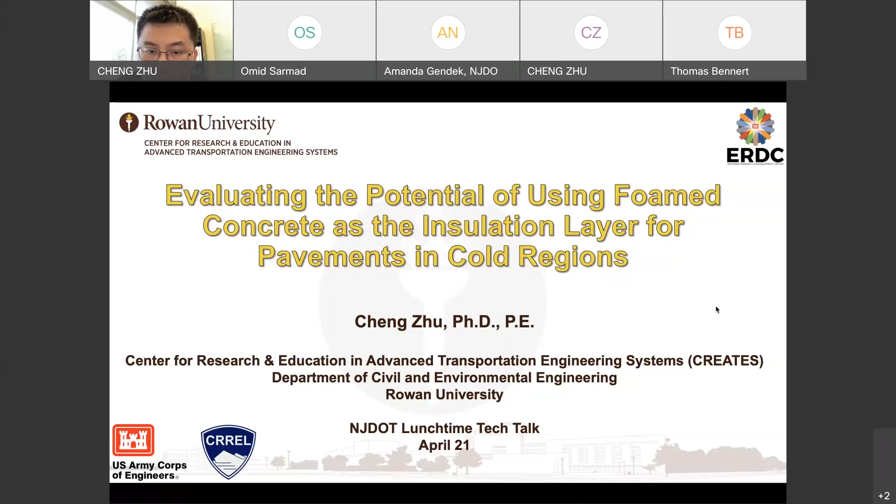Good afternoon, everyone. Thank you very much for coming to this webinar, and thanks NJDOT for organizing this Lunchtime Tech Talk. I'm Cheng from Rowan University. Today I would like to present our research on evaluating the potential of using foam concrete as an insulation layer for pavements in cold regions. First, I would like to acknowledge the support that we have from the Department of Defense Cold Regions Research and Engineering Lab and a number of our collaborators, as well as our internal collaborators at Rowan University. We also received support from several local companies for providing those materials for testing.

So this is the outline of my presentation. Let's start with the background and objective.

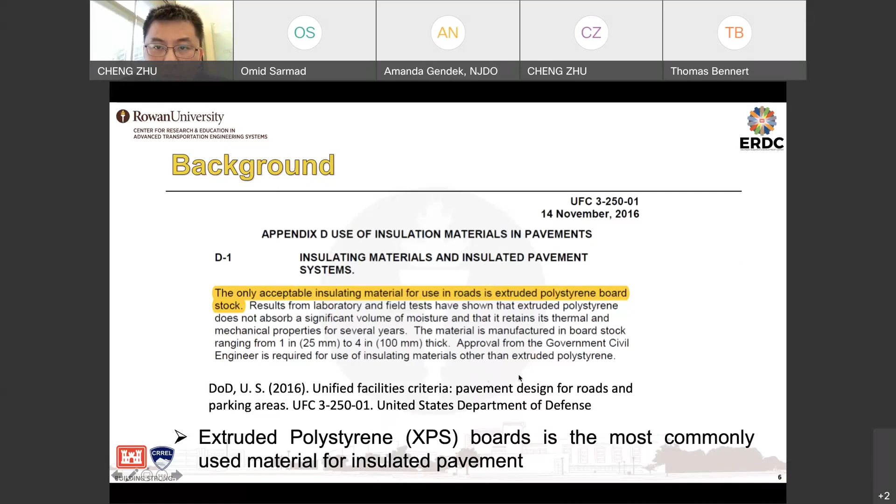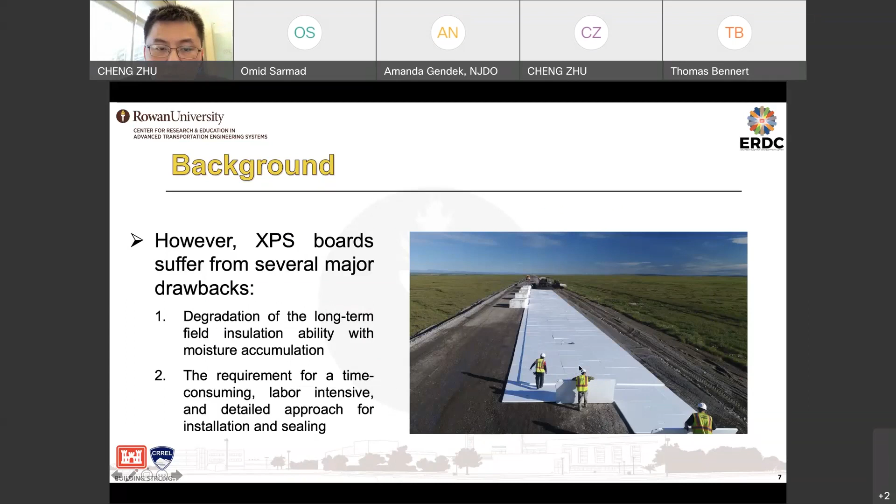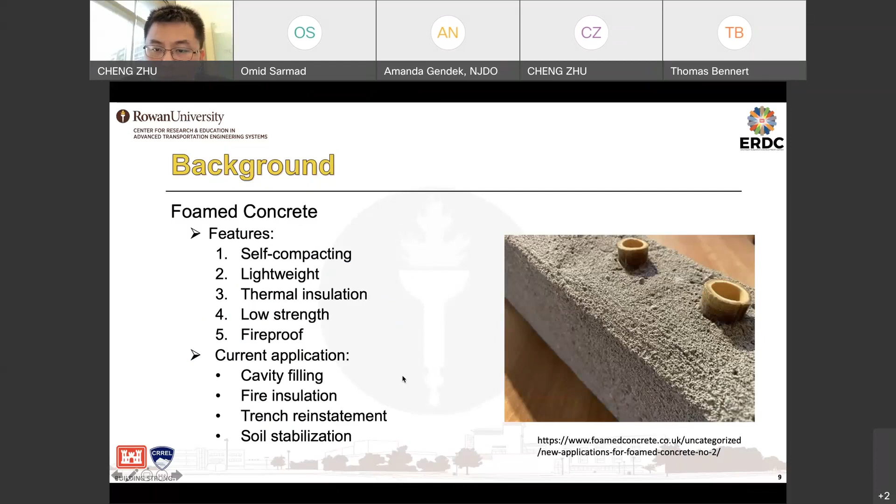Alternative materials have been tried, including tire chips, bottom ash, and foam glass aggregate. We are also studying other materials, but in this talk today I'm going to focus on one type of material that has not been fully understood for insulation layer applications: foam concrete. Foam concrete has its own features, including being lightweight with thermal insulation properties. The insulation comes from air bubbles embedded in the cement material. Currently it has been applied for many other applications, but we want to look at its potential for thermal insulation in pavement structures in this study.

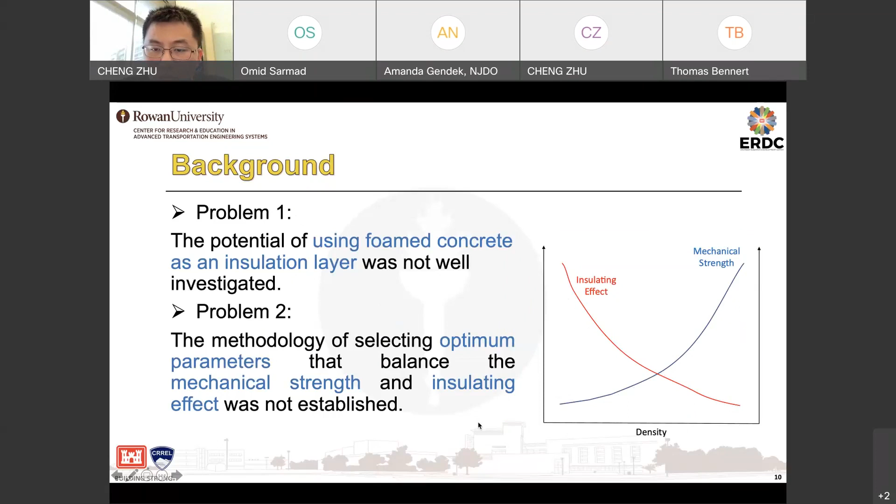Here are the research objectives in this study. We want to look at the relationship between foam concrete density and thermomechanical properties through laboratory testing. Next, we will develop a thermomechanical coupled finite element model to predict the thermal and mechanical performance of insulated pavements. We also conduct large-scale testing of foam concrete, including a full-scale insulated pavement we constructed to calibrate and validate the finite element model. Finally, we perform parametric studies to investigate the influence of different factors on the insulation effect.

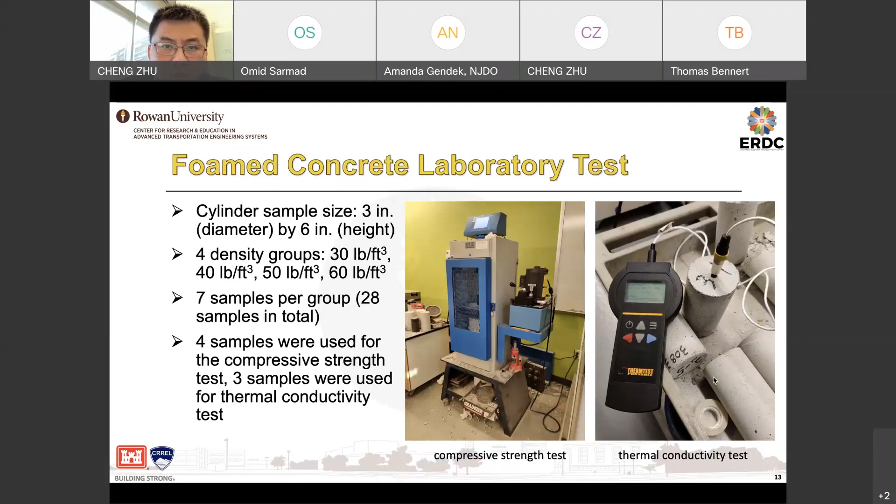The results show that with increasing cast density, the compressive strength increases, because of the reduced air bubbles in the concrete sample. Also, with higher density, the thermal conductivity values also increase.

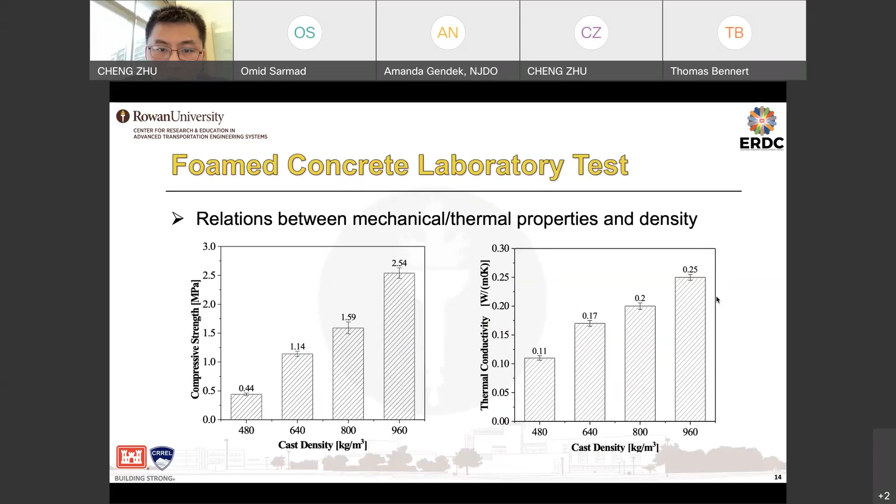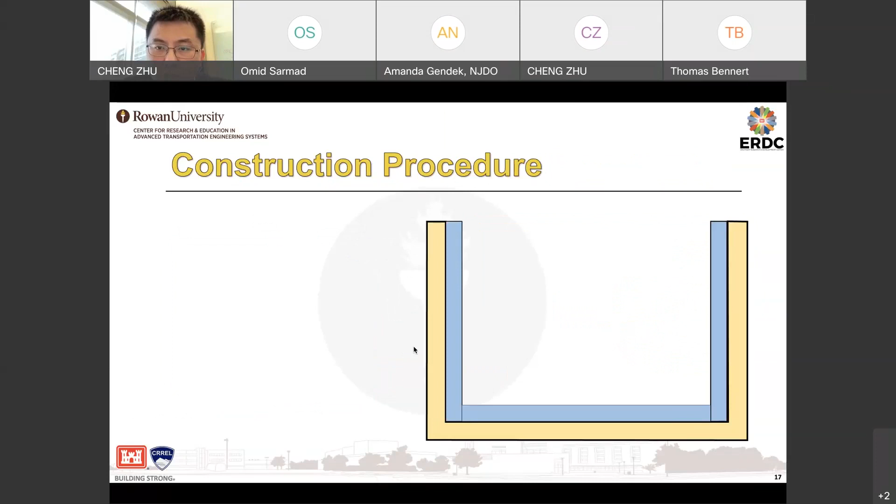First, we make this soil box, and we put the XPS board as the insulation layers, which are indicated by this blue color. And then we install those thermocouples to measure the temperature in the soil and the pavement section. The soil samples are initially wet, and then we dry the samples. We add the target amount of moisture to reach the optimal moisture content.

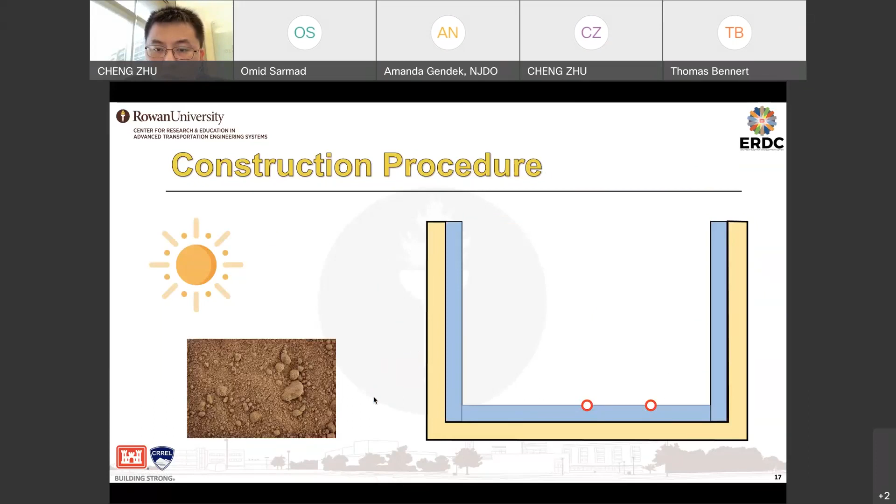Next, we mix the sample and compact the sample into the different layers. We compact the sample and make multiple layers for the subgrade, and we use this gauge to measure the density, to make sure the density and water content satisfy our expectations. We repeat this process for multiple layers, and that's how we prepare the subgrade layer.

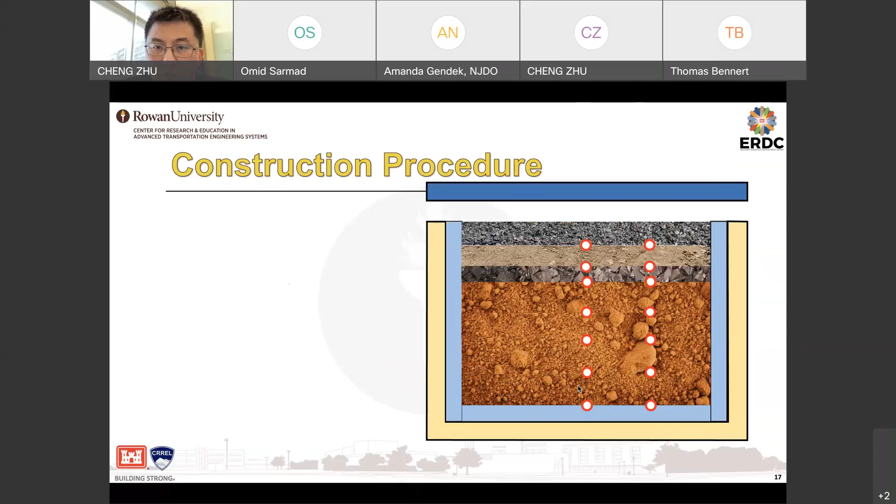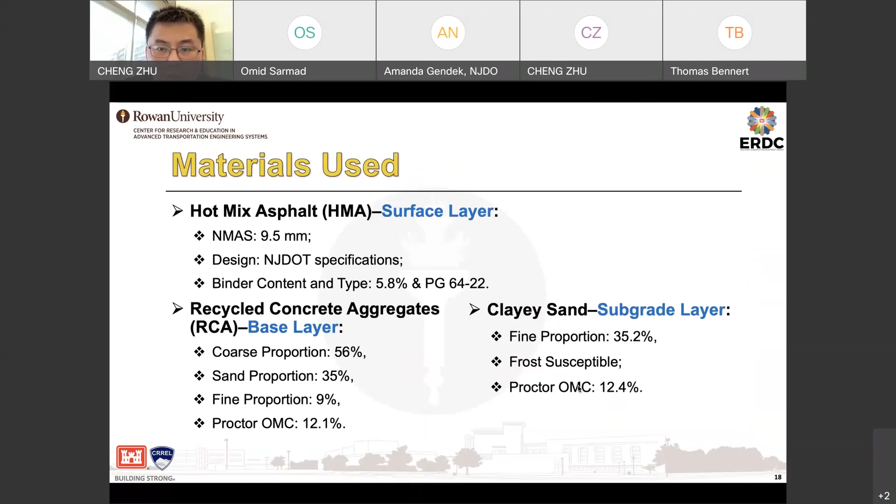Next, we add this insulation layer. After the insulation layer, we prepare the base layer. The base layer, again, is soil with a target water content, so we have to repeat the process again. After that will be the HMA layer on top. In the end, these are the material properties involved in our test. In total, we have surface layer, base layer, subgrade layer, and the insulation material.

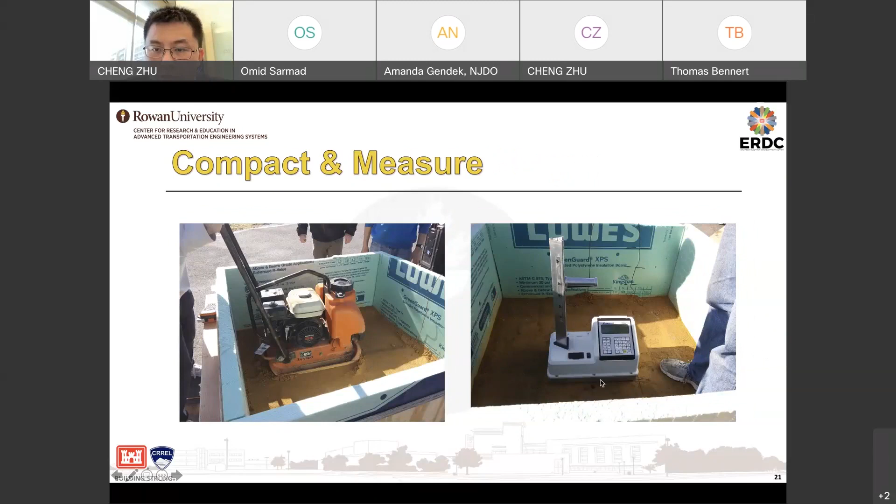Here are some of the pictures we have when we build this soil box. We prepare the soil samples and we compact the soil. This wire is the thermocouple we use to measure the temperature at different depths. Then we compact the soil for each layer, and measure the density for quality control. This is the foamed concrete we add as an insulation layer.

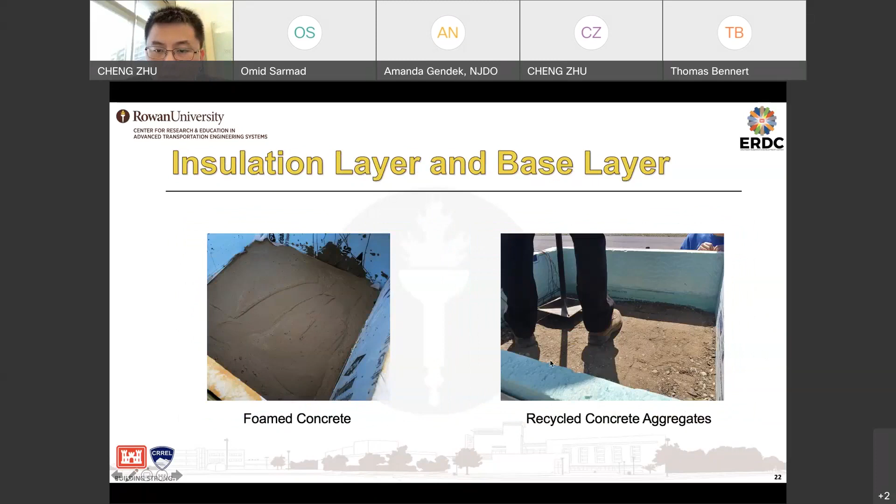After that will be the base layer using the recycled concrete aggregates. In the end, we put the HMA layer, with all the thermocouples connected to the data logger. This is a picture showing the frost panel we built to create the cold temperature on the surface. This frost panel is connected to the chiller.

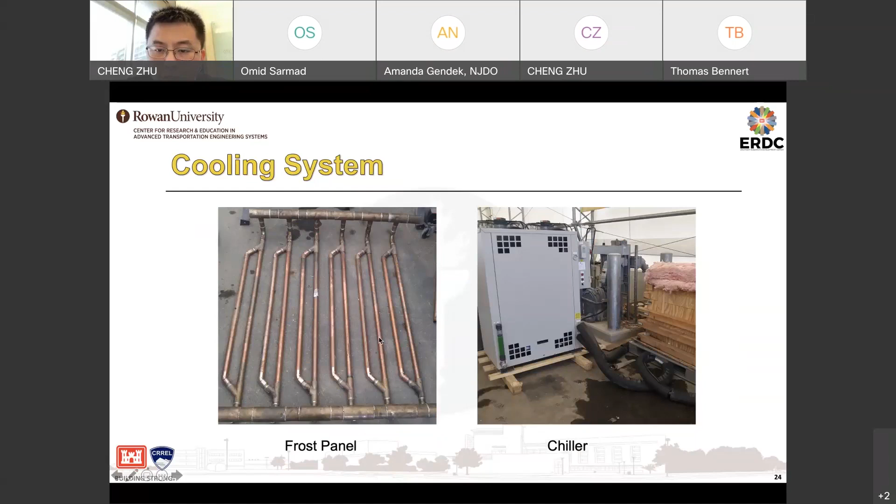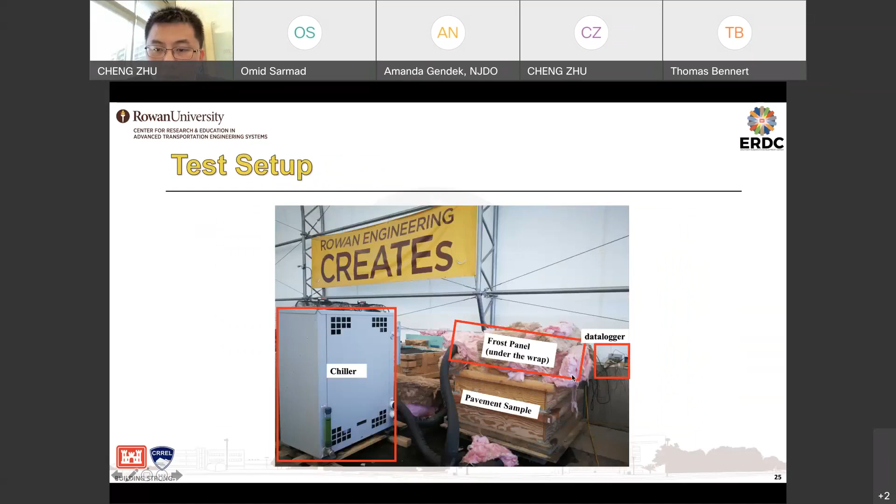This is the overview of the experimental setup. We have the full pavement structure box with the frost panel on top, and those are the insulation materials to prevent heat transfer from the surface. And all the thermocouples are connected to the data logger.

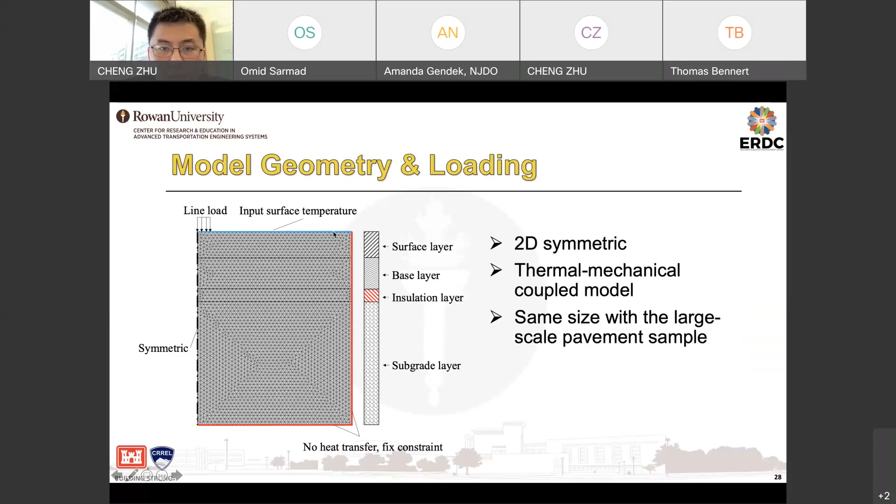Next, I want to show the numerical model that we have configured. This model was a 2D symmetric model. We consider the thermomechanical coupled process, and the size is the same as the experimental sample we did in the lab. It includes these 4 different layers. Because it's symmetric, we only used half of the model. On top, we also apply a line load to mimic the traffic load. The surface temperature input is the same as what we measured.

After we do the finite element modeling, we use the output to calculate the pavement rutting and cracking. The equations that we use come from the MEPDG. Some of the equations are listed here.

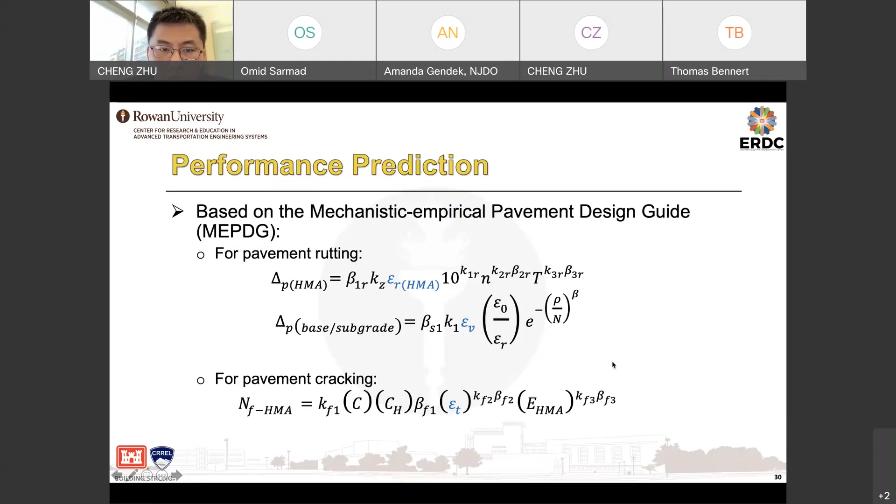This is the calibration of our experimental results versus the numerical model. The numerical parameters are calibrated so that the predicted temperature at different layers has a good fit with the experimental data. From there, we can get the mechanical and thermal properties, especially the thermal properties of the different layers.

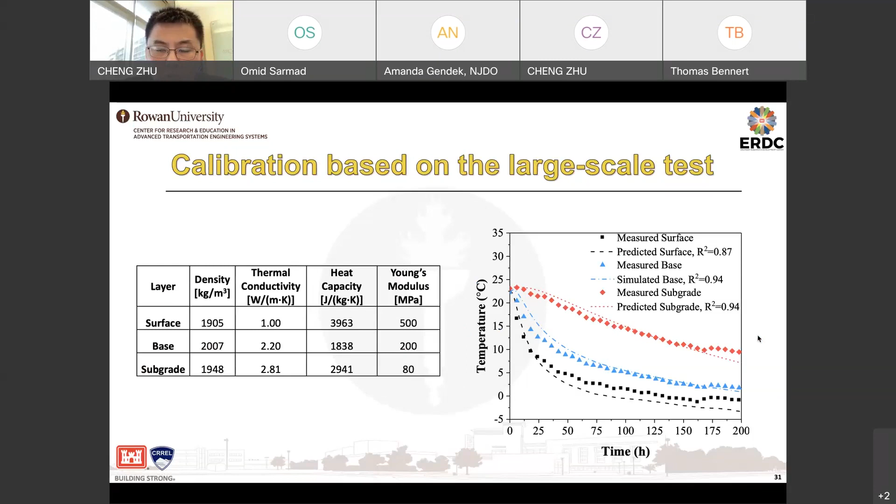Next, we performed some parametric studies using the FE model. There are 2 groups of studies. One is to study the influence of insulation layer thickness. Another is to study where the insulation layer is installed, so the depth of the insulation layer.

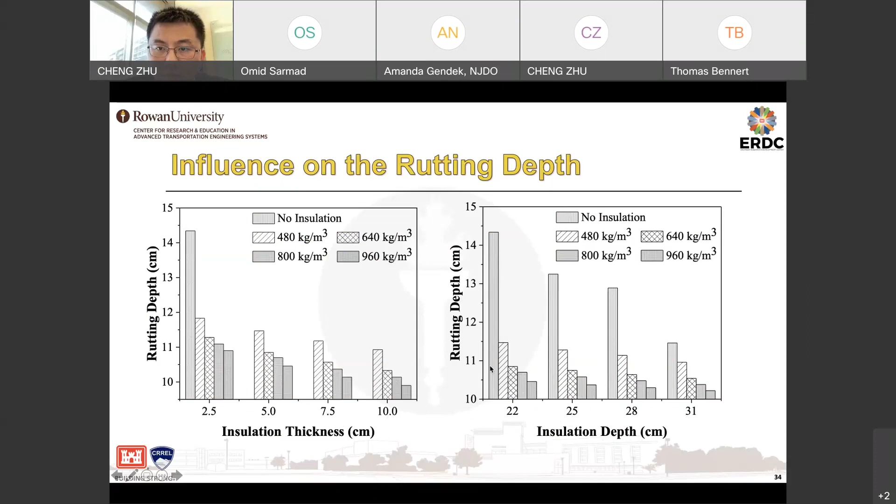And based on this cracking, we can actually calculate the maximum allowable traffic. With a higher insulation thickness, we see a significant increase of the maximum allowable traffic. Here, for the insulation depth, the effect on the maximum allowable traffic is not very obvious. This means thickness has a larger impact on the improvement of this pavement structure to resist the traffic load.

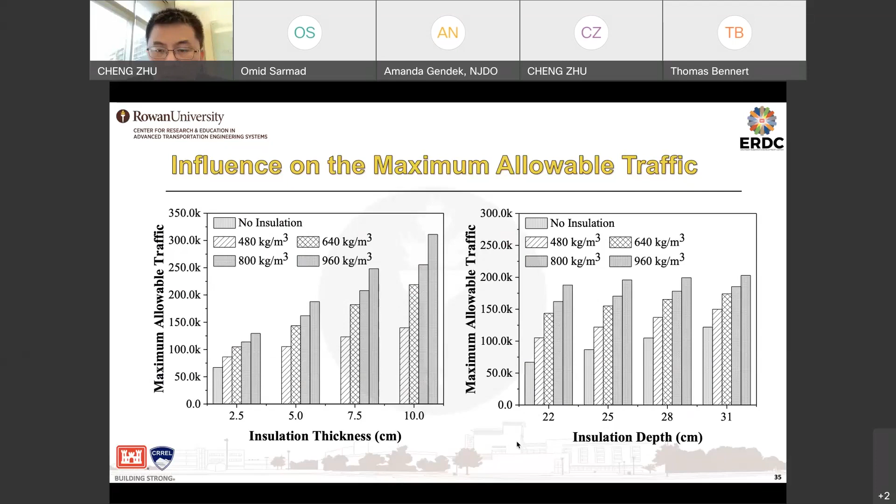If we increase the depth of the insulation layer, it will achieve a better mechanical performance and also increase the frozen depth. Using a foam concrete with a higher density results in a better mechanical performance.

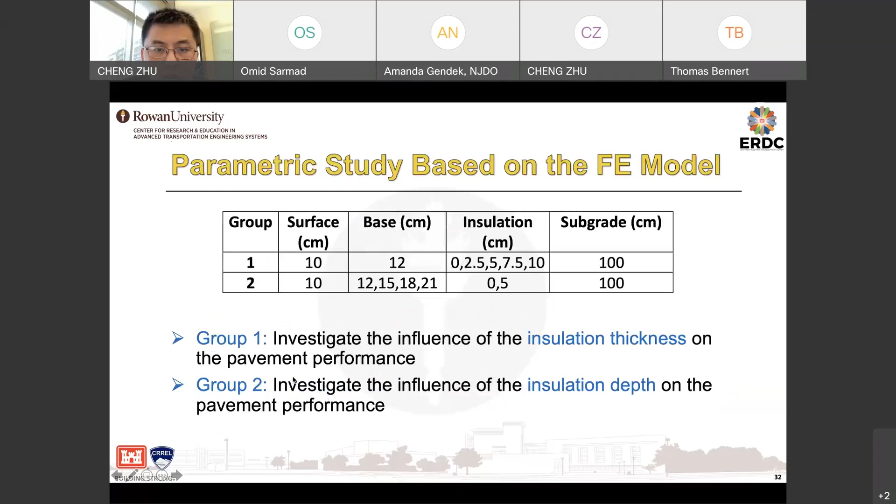However, if we look at the larger scale of the pavement section in the field, so when we specifically look at the pavement itself, we usually consider the heat transfer to be along the vertical direction as well. So in the experiment, we installed this XPS board mainly to control the heat transfer and minimize any heat loss around the side boundaries or from the bottom.

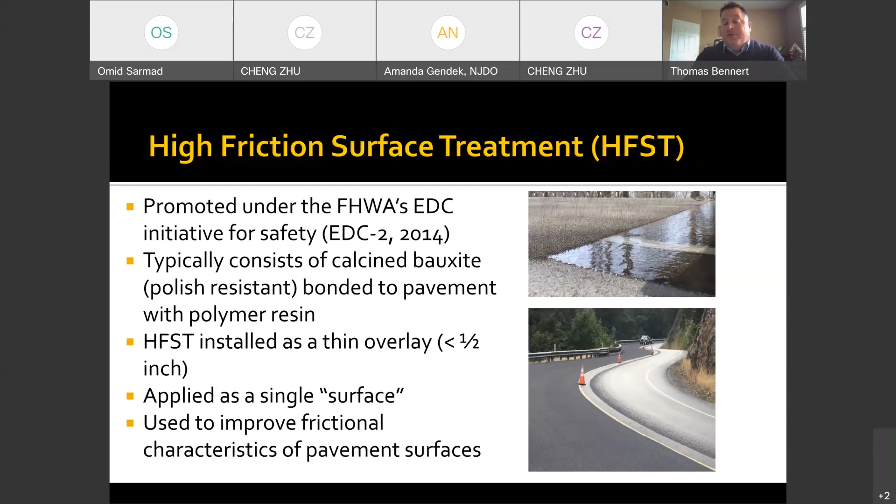We generally like to see them around horizontal curves where we generally have some lane departure issues. But in most cases, what we generally see the municipalities and the state using are in declines where there's braking and the horizontal curves. They do significantly improve the friction over what we would generally have as a typical pavement surface.

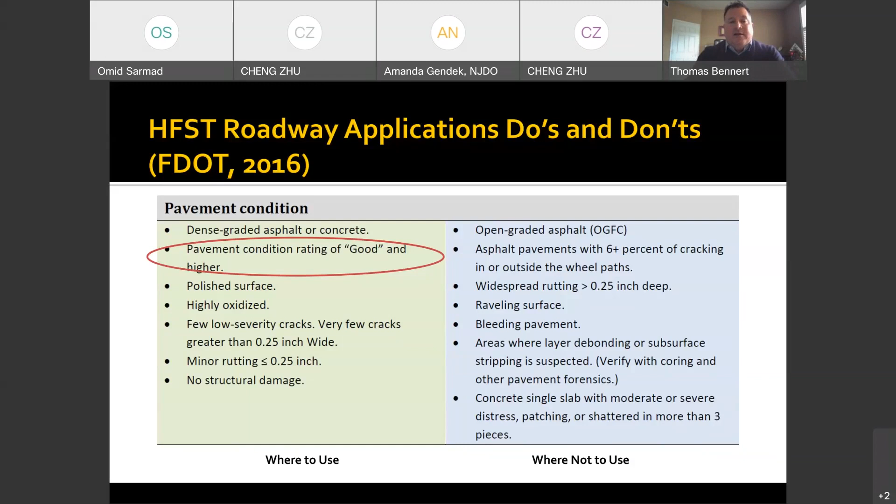The big thing here, though, is that there is a recommendation for a good pavement. And the problem is what defines good. And so when we're talking about selecting or pre-screening pavements, in general, we think of good as no cracking, no rutting. But can we actually have a pavement that appears to be in good condition, at least from a visual perspective, but not be a candidate for HFST?

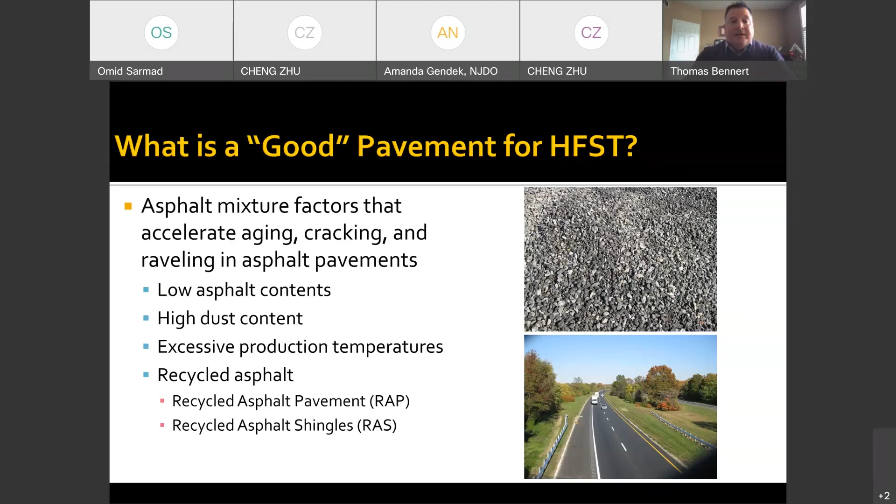And we can get into a situation where these are new pavements, but yet are not suitable. The question is how do we determine whether or not these pavements are suitable? So this goes into some of the initial forensic work that we were doing.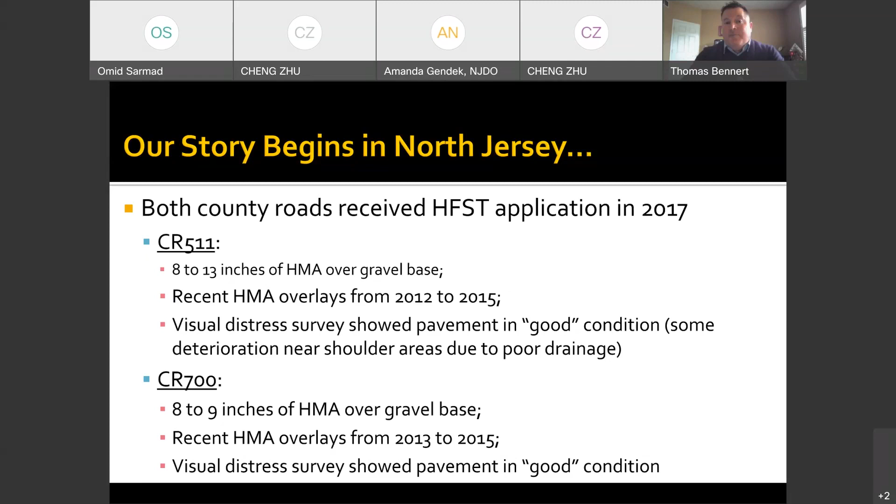And just like most Sopranos stories, our story begins here in North Jersey. We have 2 county roads, and note that the municipalities utilize the New Jersey DOT specification when applying HFST. Both roads were in good condition. They're very similar in structure. Visual distresses were good, and at the time, a couple of years before the HFST application, they were actually resurfaced. So we have 2 sections that would appear to be in good condition.

These shallow distresses are typically caused from a couple of things. One, we have a weak substrate. The pavement layer below may be prone to some raveling or cracking. It usually occurs in areas of turning or some extreme stopping, so you have some external forces being generated. They are also caused by thermal induced stress, and we'll talk about that in a minute.

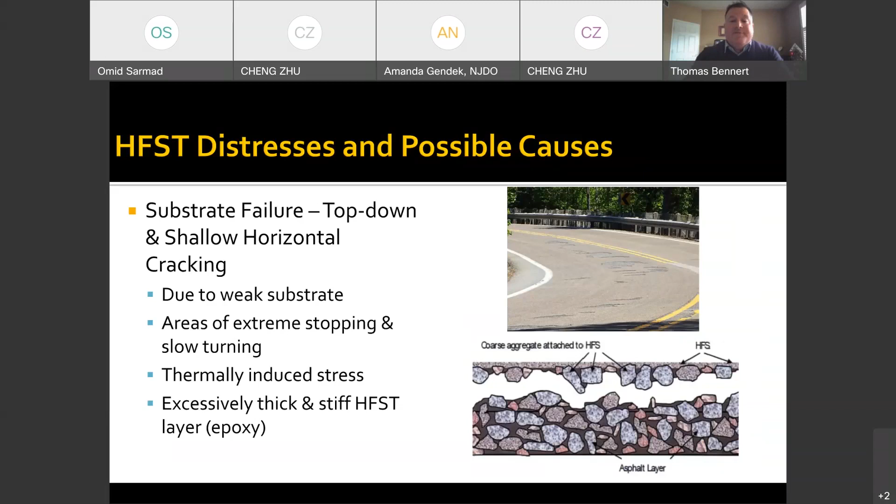It can also be caused by excessively thick epoxy. The epoxy thickness is very important on this material, because if it's too thin, the aggregates can actually ravel out, pull out, and you're left with just a sheet of epoxy. If it's too thick, the aggregates can be seated too deep, and then you're losing some of that friction. The other thing that happens is that if the epoxy is too thick, due to this thermal cycling, you can actually create a greater stress applied to the surface that can pull that HFST off. And that's generally what we were seeing in these sections.

So here's Stevenson Ganthier, formerly of New Jersey DOT Materials, now NJDOT Construction, showing a panel that we found on the side of the road. And that's about a half inch thick. And if you look on the other side of that panel, you'll see that that's really the top layer of aggregates and asphalt from that section.

One of the major problems with this sort of application is the epoxy that's used is not thermally compatible with asphalt. On the bottom shows what we call coefficient of thermal expansion of different materials, and you can see that the epoxy used with the HFST is anywhere between 3 to 4 times greater than typical asphalt materials. So that means it's going to expand or contract 3 to 4 times a greater rate than what we would typically get for normal asphalt.

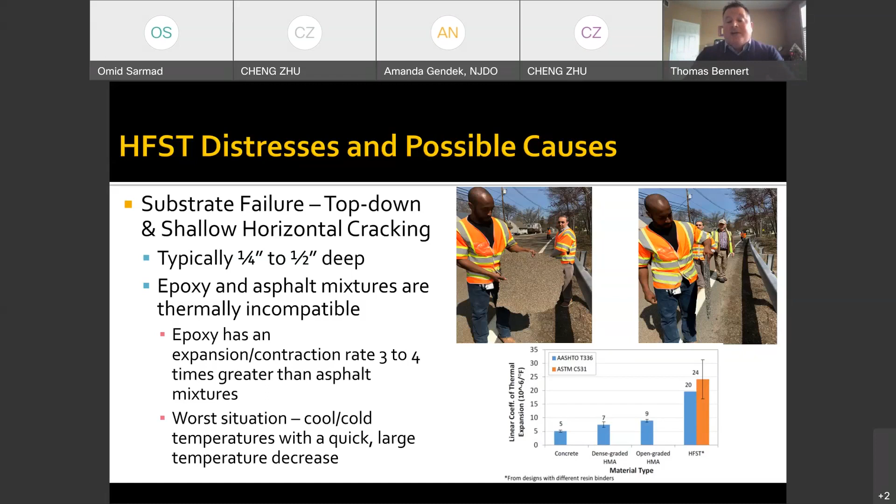Now, if the asphalt is relatively new and is in good condition, we would expect it to be able to withstand some of that. But as I mentioned before, when we get into some asphalt that may be oxidized, have some higher recycled contents, you may actually be prone to these shallow delaminations, even though that asphalt is relatively new. So what we did is we went back to these sections and took a very good look at what we're seeing and tried to figure out what we could utilize as a pre-screening tool. What would be something that would be simple, wouldn't require a lot of work, but would provide enough information that we can pre-screen certain pavements prior to whether or not an HFST application would be selected.

So what we did is we looked at a couple different tests. This one is fairly simple to use. This is ASTM C1583. It can be done on a 6-inch diameter core. We make a little bit of a pre-core cut into the HFST. You can see in the picture below, through into the asphalt material, and you actually can pull it, and you can see the pull-off strength of the HFST. It's a test method that's typically used in concrete, especially in tunnels. But what we're looking at it for here is really, can that asphalt material at the top be pulled off? And this would be done prior to the HFST application. This picture here just shows you what it would look like with the HFST.

The other thing we want to take a look at is, well, pull-off strength tells us one thing, but we can still have high stiffness with materials that are highly aged. So we're also looking at the asphalt binder properties in the top half inch of the material to get an idea of the durability of that asphalt binder. There's two different asphalt test methods we can utilize.

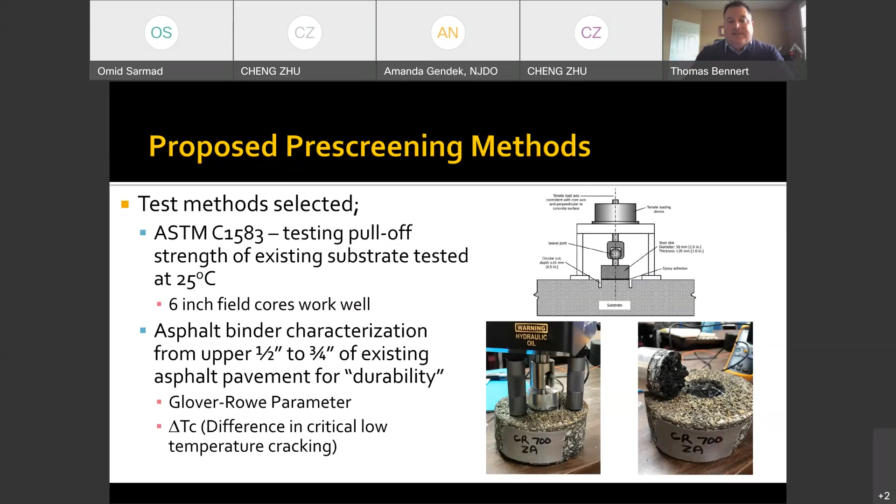One's called a Glover-Rowe parameter, delta T sub C from a bending beam rheometer. These are fairly simple and routine to run in the laboratory. The nice thing about the Glover-Rowe parameter is you can get all the material you need from really one core if it came down to it. You only need approximately 5 to 10 grams of material to run duplicate or triplicate samples, and it provides you with an idea of the relative stiffness aging of the material. There are some thresholds that have been developed to determine whether or not the asphalt binder is good.

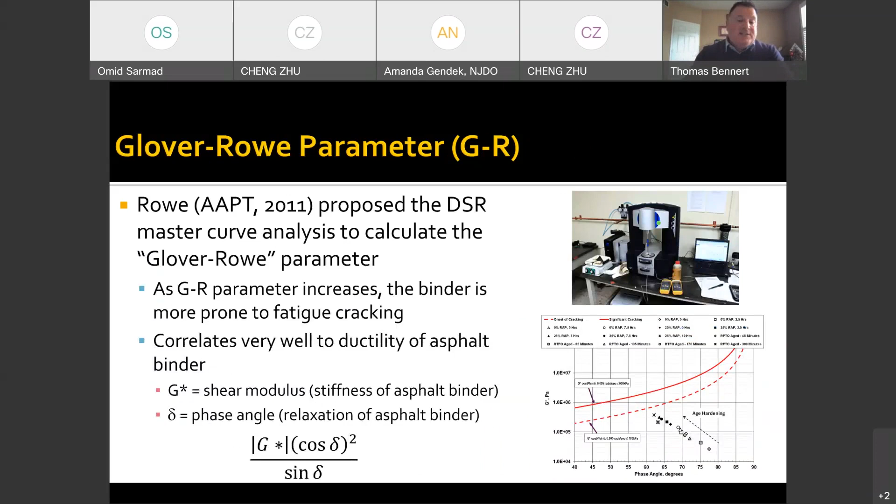If you have an excess amount of material available, you can also run the same level of testing in what we call the bending beam rheometer. This is the traditional test used in Superpave binder grading for low temperature properties. We look at this delta T sub C, and that gives us a relative idea of how the relaxation properties of the asphalt binder are being lost, typically over time through oxidation aging, or by use of too much recycled product like shingles or RAP.

Both methods work fairly well, but the first method, Glover-Rowe, requires a lot less material, so it's a little bit more conducive to very quick forensic type work.

Just to give you an idea of some of the pre-screening results we've seen: we took a look at approximately 8 different sections across the state with varying degrees of performance. You can see from the figure there are 4 sections that were performing well, and 4 sections, including those county road sections I showed earlier, that were performing poorly.

What we first looked at is the pull-off strength. In the good sections, it met a certain threshold. In the poor sections, 2 of them were below and 2 of them were above. So it shows there's some level of performance in the field related to pull-off strength, but it does not correlate exactly.

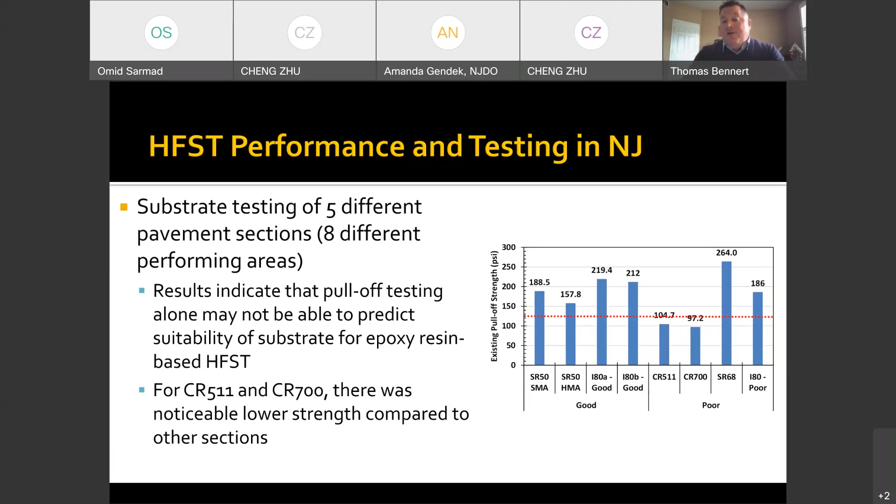As I mentioned earlier, you could have asphalt binder properties that in theory have enough durability but might just be too soft and would pull off. Or you could have a situation where the pull-off strength is very stiff and strong, but the asphalt binder properties are too stiff and would be poor for durability.

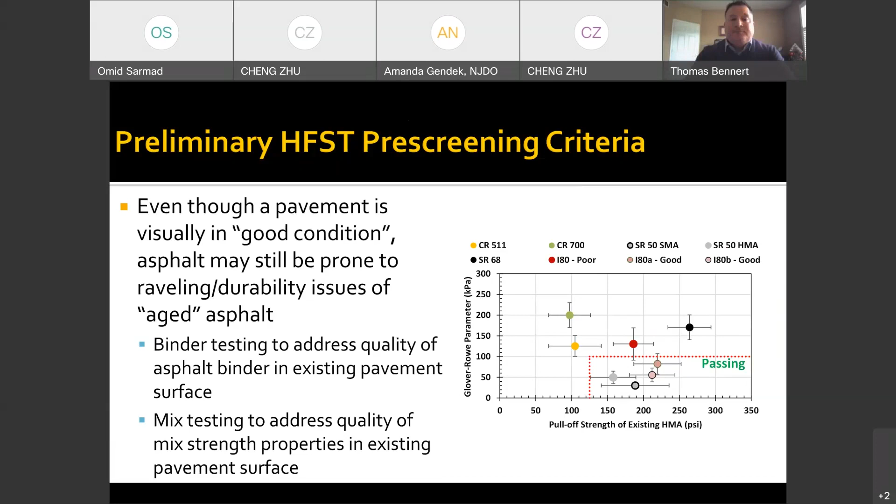Again, the major issue here with using the conventional HFST property is the epoxy being used. These epoxy materials have a very high expansion and contraction rate compared to asphalt materials. One of the things in this study was we thought, well, if the compatibility between the epoxy and the asphalt is not very good, are there some alternatives we could possibly use?

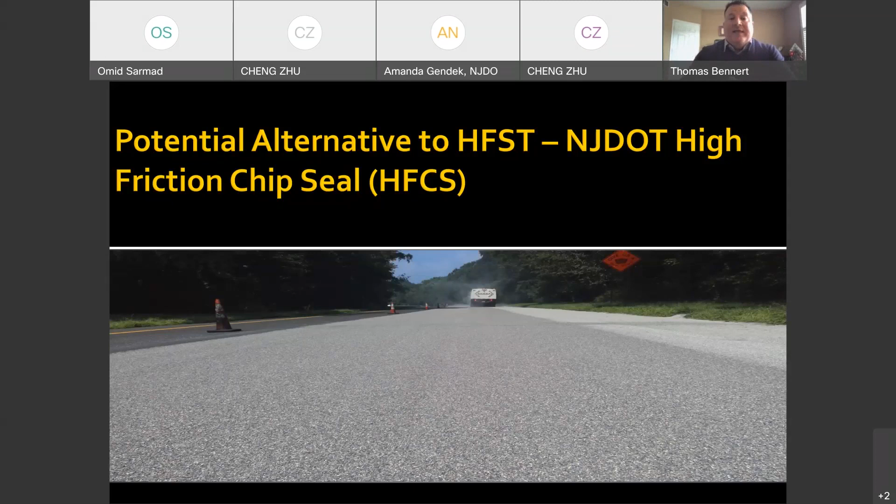The way asphalt binders are currently being developed, we can utilize a number of different polymers and methods to essentially create a fairly good bonding agent that is asphalt based. So now we have compatibility between the asphalt binder and the pavement surface that we didn't have with the traditional HFST.

This brings us to Route 68. This was a section we identified as could be a poor performer if we used the epoxy. So what we ended up doing was having an asphalt binder formulated by an asphalt refinery, and we used that as the bonding agent. The asphalt binder graded out to be high stiffness, over a PG grade of 88, but still met our low temperature PG grades of -22. So that gave us a good bonding agent that should hold up in high temperatures and allow the aggregates to be bonded in place.

Because this was a test section, it allowed us to look at different aggregates, because the calcined bauxite material is extremely expensive. So if we can use more local aggregates, ones that are easier to ship in, or simply less expensive, that would provide a cost savings to New Jersey and the municipalities. So we looked at a local diabase. We also included the calcined bauxite, and we also had a flint rock, which is a very hard aggregate from Oklahoma that we had shipped in.

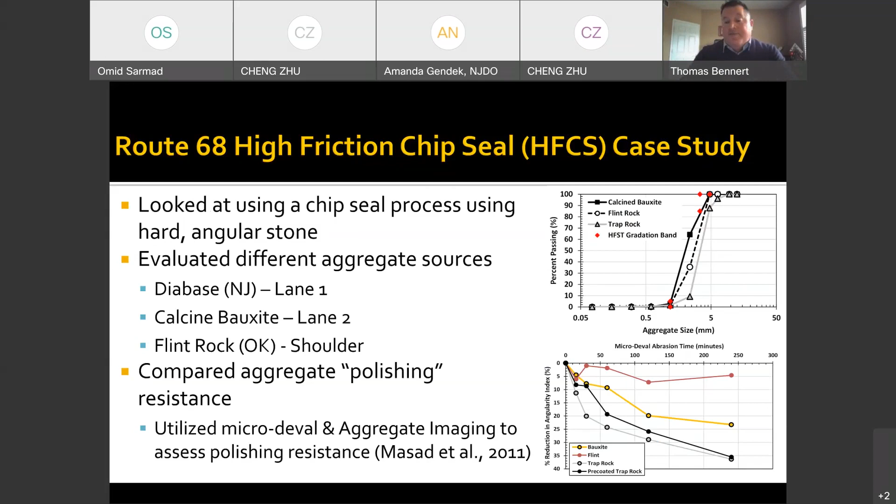There are some different means that we can actually predict the polishing levels in the field using the laboratory, using a device called the micro-deval, which is a steel cylinder where you put water and small steel shot with the aggregate, and you abrade those aggregates over time. Then we look at the angularity values using an imaging system, where we're taking photographs and using computer algorithms to compute the angularity. On the bottom right, you can see the different performance of different aggregates. So you can pre-screen your materials prior to going out into the field to check whether your aggregate types are hard enough for these particular applications.

Here's some of the process we're seeing. This asphalt binder actually grades out to what we would call a fuel resistant binder. This is the FAA P404 asphalt material. We did use a warm mix additive in there because we wanted to ensure it was pumpable through their system.

You can see in the figure all the way to the left, that's the asphalt binder, the bonding system being applied to the existing pavement surface. The center photo shows the aggregate chips being placed. They were spread down to about 14 to 18 pounds per square yard. The picture on the right shows the rubber tire rollers that seat the aggregate in place. Then, though I don't have a picture of it, there's a vacuum sweeper that comes in behind the roller to clean up all the loose aggregate, to make sure we're keeping people's windshields intact.

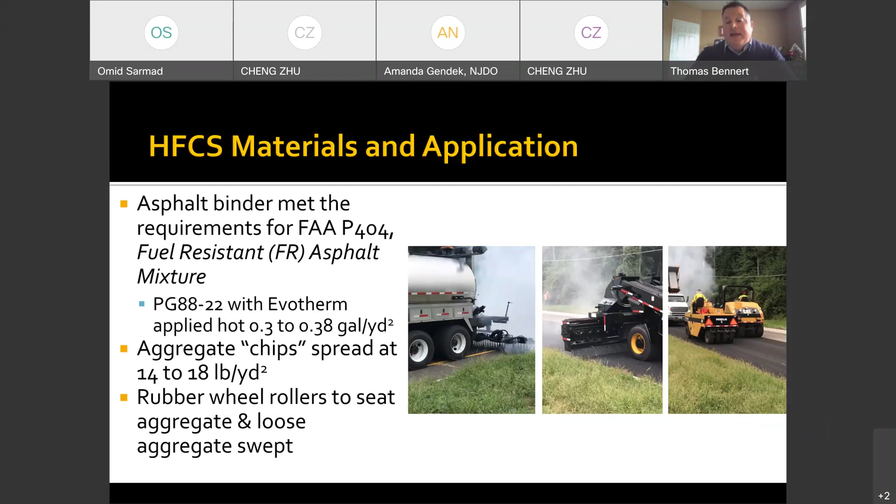It's a very similar and identical process to most chip seals. So it's not very difficult from an equipment standpoint, as long as you have a chip seal manufacturer or contractor in the state, which we do here in New Jersey, except this material we were hoping would be more compatible than the epoxy-based HFST.

With help from New Jersey DOT, we went out to these sections over about a 2-year period. I don't have the latest friction data, but I can show you some of the information we've collected. On the upper right is the diabase, lane 1. In 2018, we were in the 60s. By 2020, we came down a little into the mid to upper 50s on friction level. In the bottom right, the calcined bauxite was in the 60 to 70 initial range, now dropped to the mid to low 50s as well. So there's a slight decrease in friction, which we generally see with some HFST applications. Part of this is due to aggregate orientation, which tends to move a slight bit under traffic.

But for the bottom right, we're also attributing it to some bleeding occurring on an asphalt rubber chip seal just south of this location, and you can see that some of that binder is tracking over into the travel lanes. We believe that's affecting some of our friction results as we're doing some of the testing.

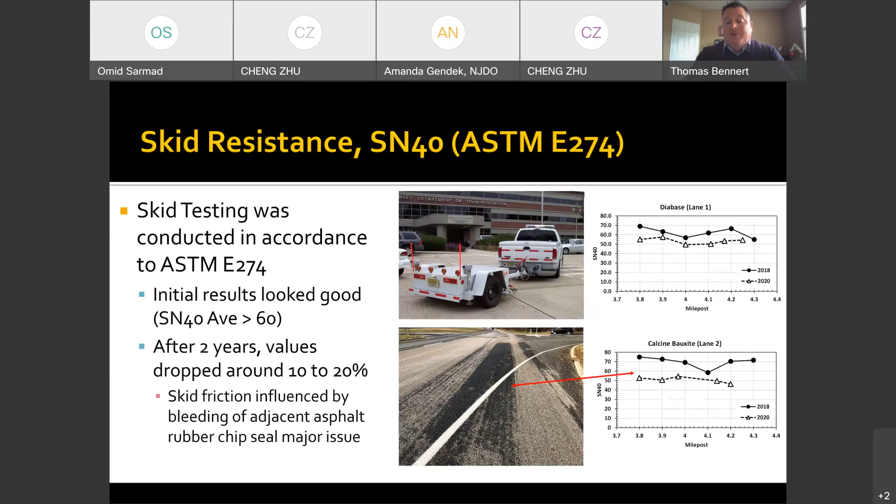We expected about a 10 to 20% drop, but our initial friction values were high to begin with. So we feel that these are actually performing quite well for the application, for the costs, and for the compatibility. The bonding was exceptionally well as well.

So we're providing a very good bond between the bonding agent and the existing pavement surface. In conclusion, what we're finding is that the current epoxy-based HFST, although they provide exceptional friction and work very well for pavement safety, there is an incompatibility between the epoxy-based material that we use to glue down the aggregates onto the road and typical asphalt materials, anywhere between 2 to 3 times.

That causes a significant problem when we look at the thermal cycling that we generally see in this state, and you get into some of these situations where one day it's down into the upper 20s or 30s, and the next day we're up into the 50s. That's a significant change and a significant amount of movement that epoxy is going to go through, and essentially it just pulls that epoxy off from the asphalt below.

So to make sure that we're not wasting money, because this is a fairly significant investment that the state and municipalities put forth to put these materials down, there's a pre-screening tool that we believe works fairly well, so you can take a look at your pavements ahead of time to make sure that they're suitable for this epoxy-based HFST.

However, what we are finding is that in cases where they're not suitable, there are two general options. One, you can go in and mill out that area and repave it, and hope that the new material goes down and is suitable. Or two, we can look at what we're calling, under the New Jersey DOT provisional specifications, a high friction chip seal.

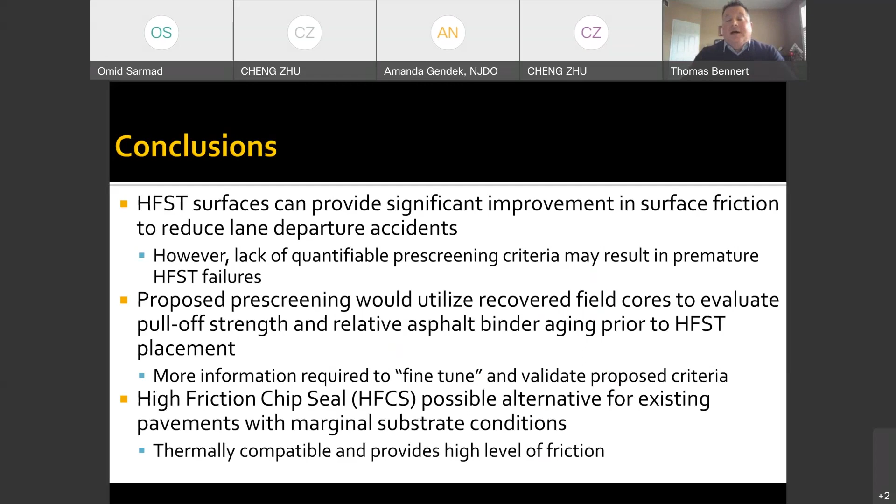Because quite honestly, what ends up happening is that when you start to get those delaminations, that entire section has to be milled out because there's just no way of patching that area.

The outline of this presentation: I'll give an introduction on why we're looking at bridge corrosion in particular, then the testing procedure for all the specimens I did, then the macrocell current results we collected, and the chloride profiling results we collected.

Why are we concerned about corrosion? In a 2002 study, it was found to be an $8.3 billion problem for highway bridges specifically. In reinforced concrete bridges, the primary cause of deterioration we see is chloride-induced corrosion, compared to other types of deterioration such as frost attack, ASR, and carbonation.

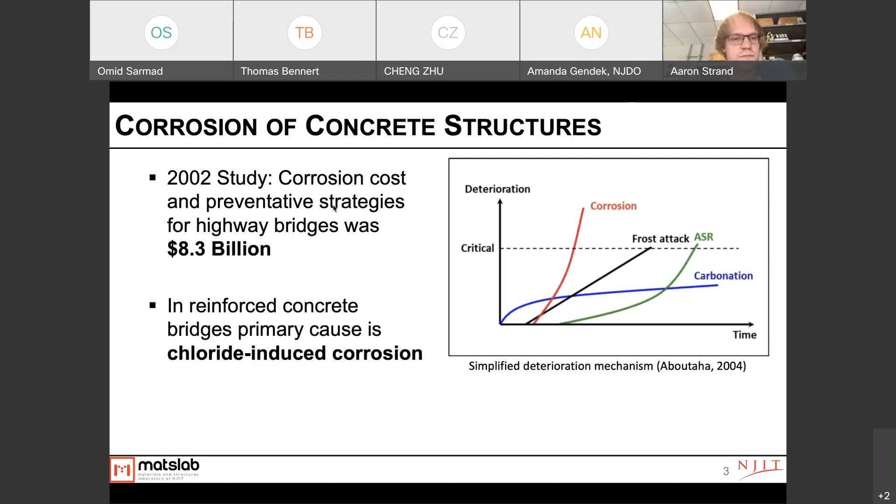For the causes of corrosion of steel in concrete, the three major methods are chloride, carbonation, and dissimilar metals embedded inside the structure. With chlorides, we'll sometimes see cast-in chlorides, but we'll most likely see surface-applied chlorides. That's the focus of this project.

These surface-applied chlorides typically come from road salting. In 2014 in the United States, 24.5 million metric tons were used just for de-icing roadways, a large percentage of our total salt consumption. As the years go on, we continue to increase the amount of salt used for de-icing. The forms of salt used are typically rock salt or a brine, which is typically about 23%, dropping the freezing temperature to about -6 degrees Fahrenheit.

A more recent data point from NJDOT: in the 2018 to 2019 winter, about 400,000 tons of salt were used, 800,000 gallons of calcium chloride, and about 700,000 gallons of brine applied on the roadway in that one year.

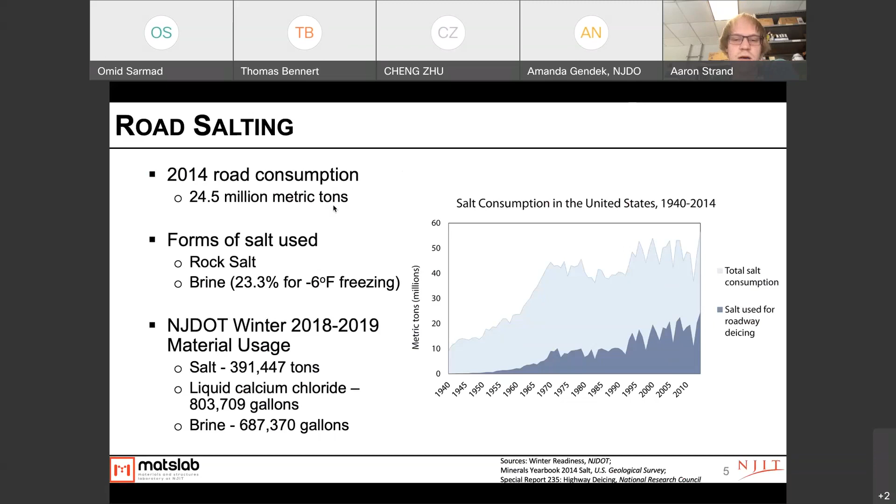What we're looking at is called macrocell corrosion, which forms between the upper layer reinforcement and the lower mat of reinforcement inside the deck. This forms when there's a local anode and a large cathode. This frequently occurs in chloride-induced corrosion as chlorides reach the top anodic steel. In bridge decks, this is accelerated due to the large cathode-to-anode area between the reinforcement bars within the deck.

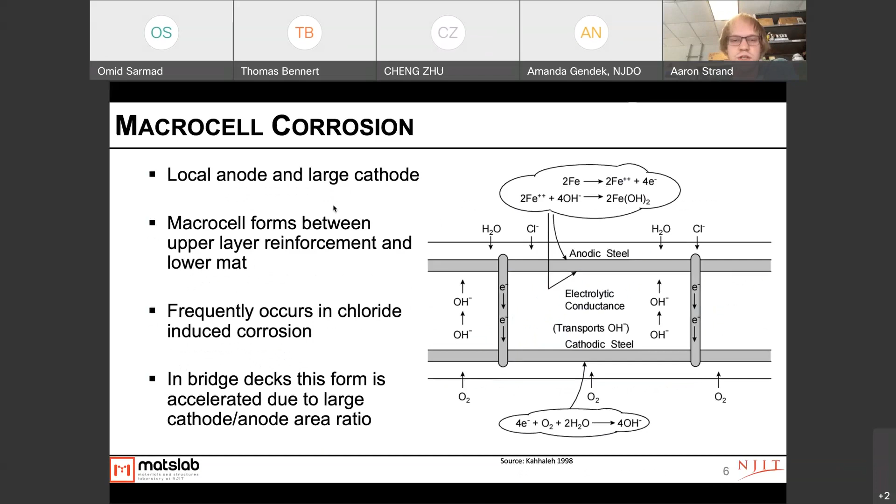There are two different mechanisms for chlorides to get in. Typically we see chlorides through the diffusion mechanism, where chlorides penetrate the concrete to reach the reinforcement, creating a concentration gradient. There's also a more direct access where chlorides have a concentrated path to reach reinforcement, typically found through cracking of the structure.

Sources of cracks we see in bridge decks are typically plastic shrinkage, drying shrinkage, surface tears from finishing, flexure and deflection of the deck from loads, and other mechanisms like reflection of underlying cracks or joints seen in overlays, plus temperature-related mechanisms. These cracking mechanisms are important because things like plastic shrinkage, drying shrinkage, and surface tears can be present from basically day one on our bridges.

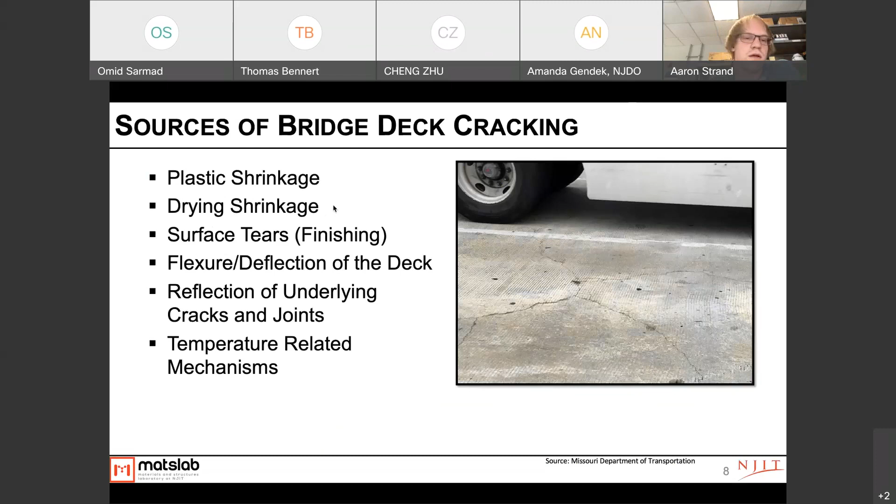So the governing question of this research was: does current testing take into account these real-world considerations—the amount of salt placed on the roads, the salt placement cycling, and the integrity condition of the bridge decks specifically?

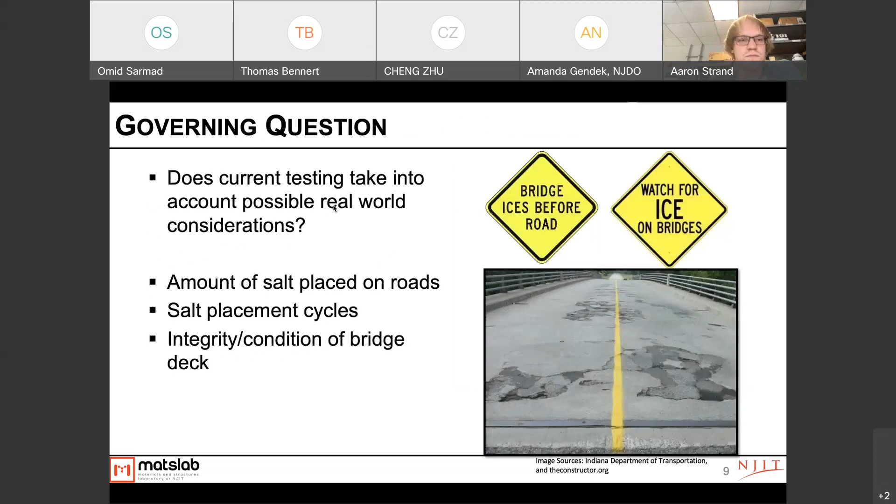So we were looking at the impact that the salt brine concentration has, as this is likely to vary, as the de-icing is probably fairly high, and any that starts to melt will probably decrease in concentration. And how do these levels impact the corrosion within the bridge deck? And also, what is the real impact of cracking, and how does it really impact the corrosion time of our bridge decks? So moving into what our testing was.

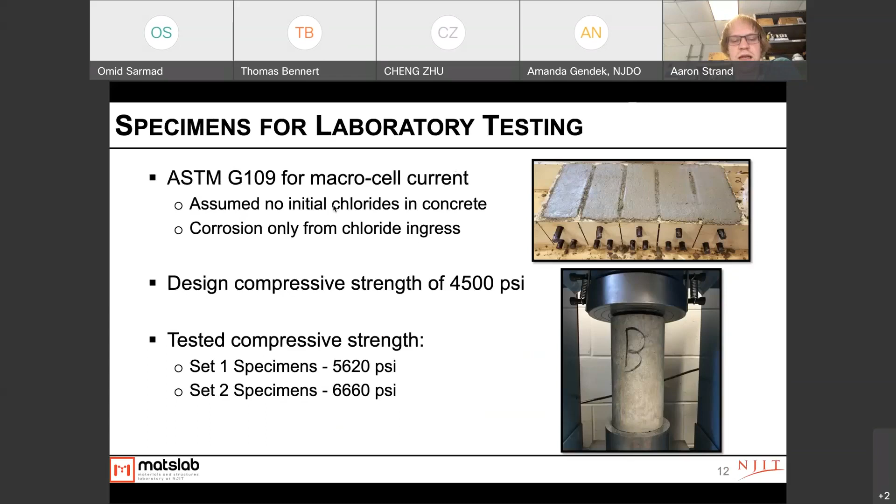So for our laboratory specimens, we used ASTM G109 for the macrocell current. In this test method, we assumed there were no initial chlorides in the concrete and that the corrosion was only from chloride ingress. These mixtures had a design strength of 4,500 psi. In order to get the amount of samples that we needed, we cast them as two different sets. Set one was 5,600 psi, and set two was 6,600 psi. This is due to some issues in the formwork and some consolidation issues on the bottom of some of the specimens in set one, needing a set two to complete our testing matrix.

ASTM G109 has been previously used to study corrosion in steel in ordinary Portland cement and also high performance concrete. It's typically been used for surface applied corrosion inhibitors, and has also looked at corrosion resistance of microalloy steels. In this test method, there are three bars of reinforcement embedded into the beam, two cathode rebar on the bottom and one single anode rebar on the top. A resistor is placed between them to create the cell. The chloride brine is ponded inside the dam on top, and the sides and top outside of the dam are coated with epoxy, so the bottom is left exposed to the air.

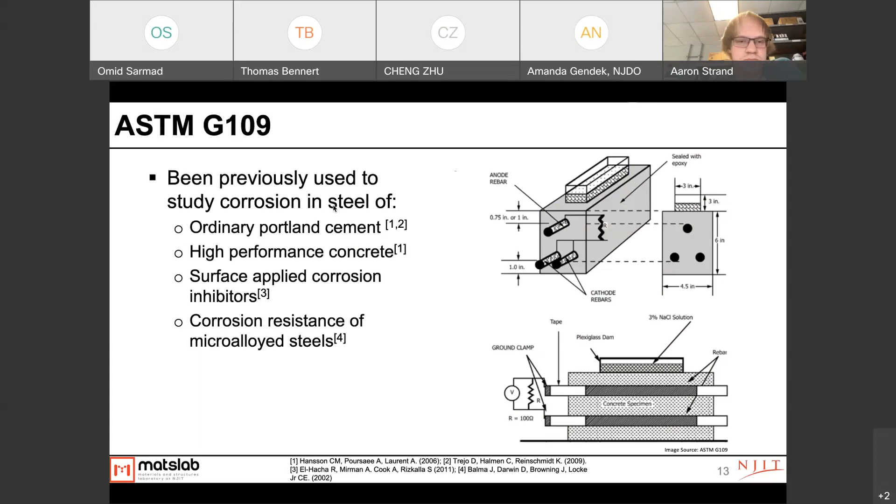For curing, all our specimens were cured for 28 days in high relative humidity. They were then cured at 50% relative humidity for 14 days before the crack was induced and the epoxy coating was added. They were cured for another 14 days at 50% relative humidity before any chloride brine testing was started. The testing involved 14 days with a salt solution on top. Unlike ASTM G109, where data was only collected during the wet cycle, we collected a measurement every 3 days. Then the salt solution was vacuumed off for 14 days, again with measurements every 3 days. Obviously 3 doesn't go into 14, so there's a 2-day interval between the last 2 measurements. This cycle was repeated continuously until testing was stopped.

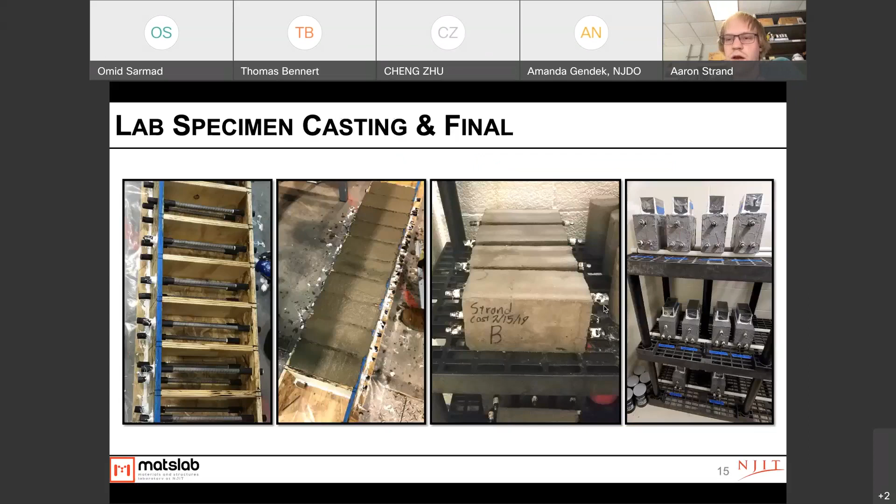In order to form the crack in the specimens, a single point load was applied with the specimens turned upside down, so the surface was on the bottom. They were loaded up to 14.5 kips, though testing was stopped if cracking was observed, at 5,000 pounds per minute. Through this method we didn't control the crack width, but we did measure them, resulting in crack widths between 0.004 and 0.012 inches. The cracked specimens were randomly assigned brine levels to minimize any bias of a small crack on a low brine and a large crack on a high brine, or vice versa.

We used 5 different salt brines: 1.5, 3, 4.5, 6, and 9% sodium chloride solution. The 3% is what is specified in ASTM G109. We had one uncracked specimen and one flexure cracked specimen. Again, the current measurements were collected more frequently than specified in ASTM G109.

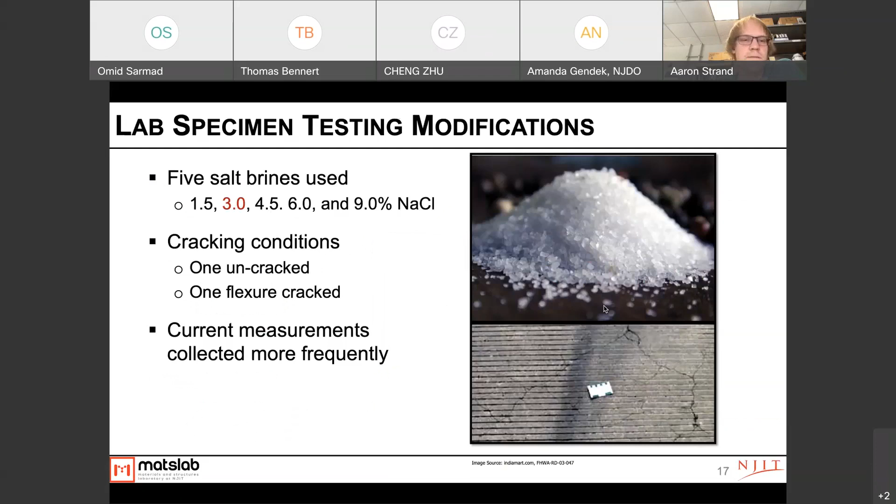For data measurement, we measured the voltage across the resistor, which allowed us to calculate the current within the cell. The threshold value in ASTM G109 for integrated macrocell current is 75 coulombs. A macrocell current greater than 10 microamps indicates that corrosion was able to initiate and possibly was occurring, but it didn't definitively prove that it was happening.

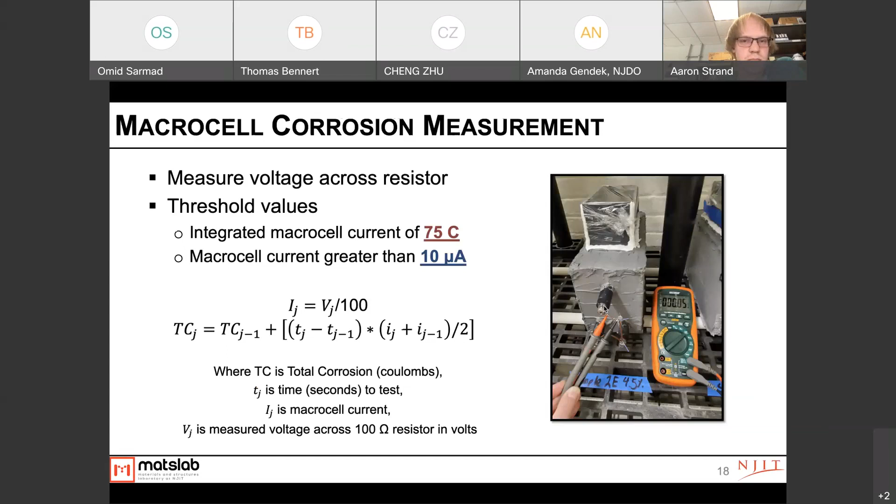So for the full large-scale bridge deck specimen that the laboratory specimens were helping to provide guidance on, it was a 25-foot wide and 50-foot long section, and it was exposed to a 6% brine, freezing and thawing, and also a moving load that went back and forth across the deck. So for this testing, we didn't collect any macrocell corrosion data. We collected the chloride content throughout, and that was done through coring of the deck.

So moving into the macrocell current results, this is what the data looks like when it was collected. And we can see that for the 4.5 and the 6% cracked specimens, even on day 3, we were getting values that were above the threshold value, and those are all bolded. And in the uncracked specimen, the values in essence represented any background values within the measurement multimeter device that we were using.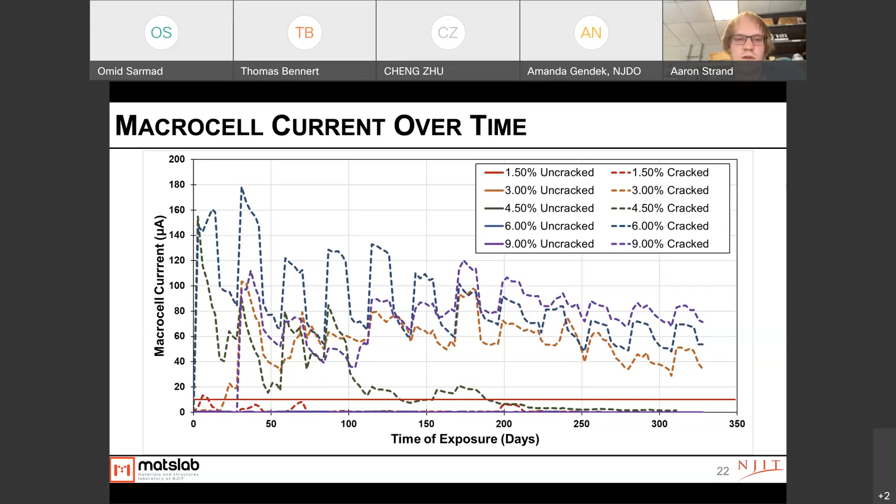So moving into this slide, this is the same as previous, but showing that the uncracked specimens stayed very much lower than the threshold that we were looking for in the macrocell current. And this again indicates that at least through testing, there wasn't any corrosion that was likely present within these specimens at the end of testing.

So the total corrosion that we measured throughout testing, and we can again see that as time progressed, the corrosion amount kept going up, and we reached the 75 coulomb threshold within about half a year for all but the 1.5% cracked specimen. The 6% reached it at a much quicker rate. This is likely due to that 6% one having the largest crack of the cracked specimens.

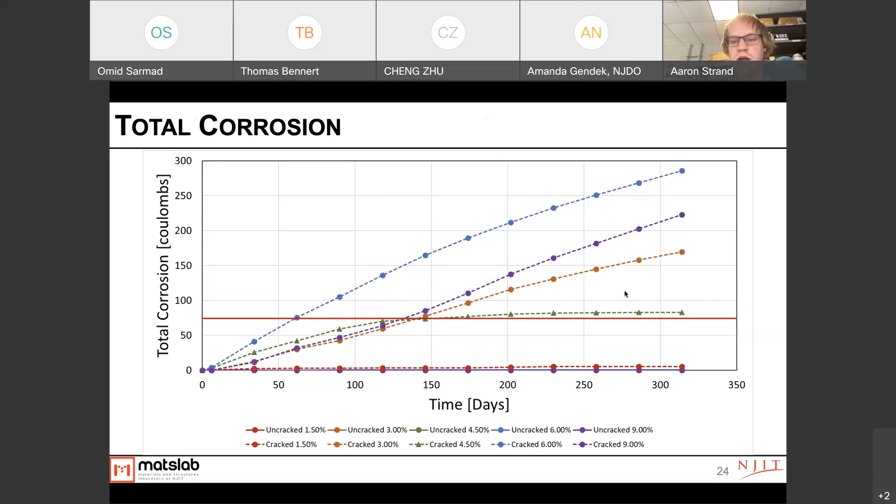So some of the findings from all of this is that for cracked specimens, a threshold was met if the ponding solution was above 3%, and it reached it at a greatly accelerated rate. And this is what we had figured. But what's interesting is for all uncracked specimens, at all chloride levels, there was no corrosion that appeared to initiate, at least within the 1 year of testing. This was to be expected, as this is a diffusion mechanism, and that does occur over many years.

And the presence of brine was a larger factor than the brine concentration, as a 3 times increase in the concentration of the brine didn't result in a 3 times increase in the corrosion values that you were seeing. And there's no difference in the current results for the uncracked during our testing time period.

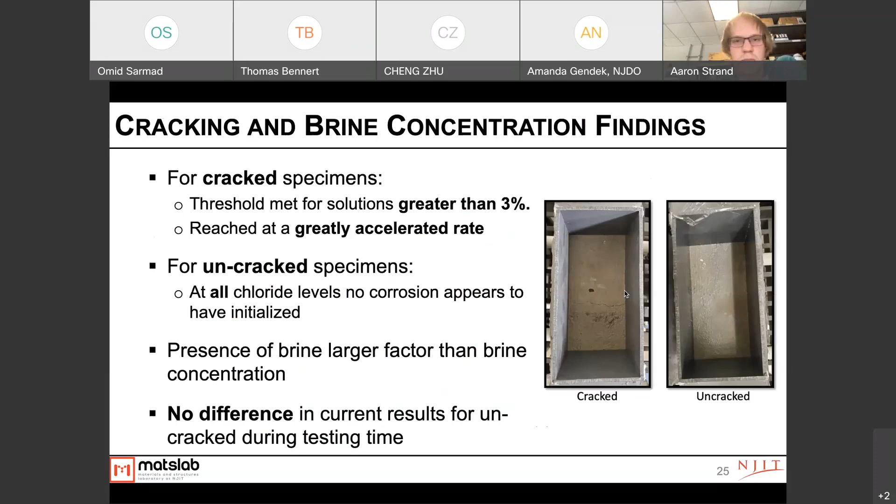Moving into the chloride profiling results. So we used ASTM C1556 for the profile layer depths, and all specimens were profiled until the reinforcement was reached, or in the case of the cores extracted from the deck, until the layer of reinforcement, as the cores were taken away from the reinforcement. The intervals were for a water cement ratio of 0.4, which is what these were cast at.

And then we did acid-soluble chloride testing using ASTM C1152 to determine the chloride content. This is what our profiling setup looked like. We used a Tormach CNC machine. And on the right, we can see what a core looked like during the profiling testing to extract the powder. We kept a tray around the outside of it in order to collect any dust that was

ejected from the bit. And on the bottom, we can see one of the laboratory specimens and what it looked like when it had reached reinforcement. Kind of hard to see in the image, but there was a little bit of corrosion present at the reinforcement in the cracked specimen when we had reached the reinforcement.

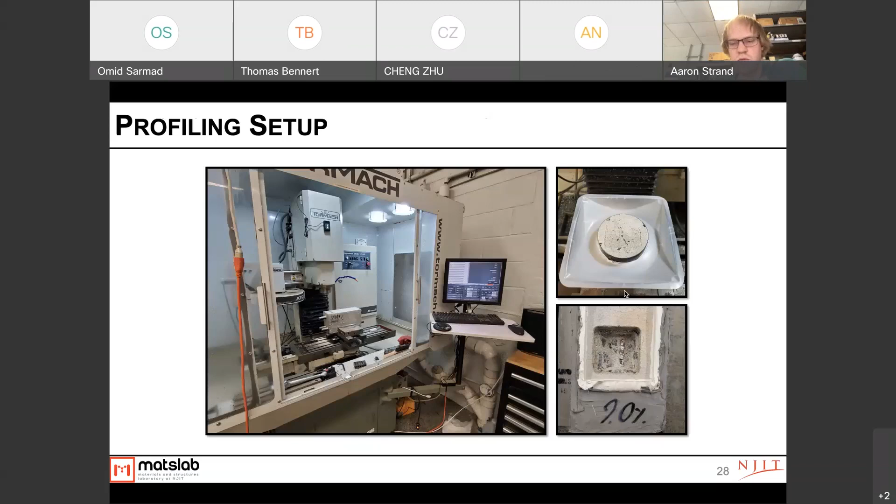So for the titration process and setup, we collected the powder sample for each of the layers, and then we used a nitric acid solution and boiled the powder inside the solution in order to extract the chloride from it. The solution was then filtered, and then we used a titration setup in order to determine the equivalence point, and that allowed us to figure out the chloride content as a percent based on the amount of concrete.

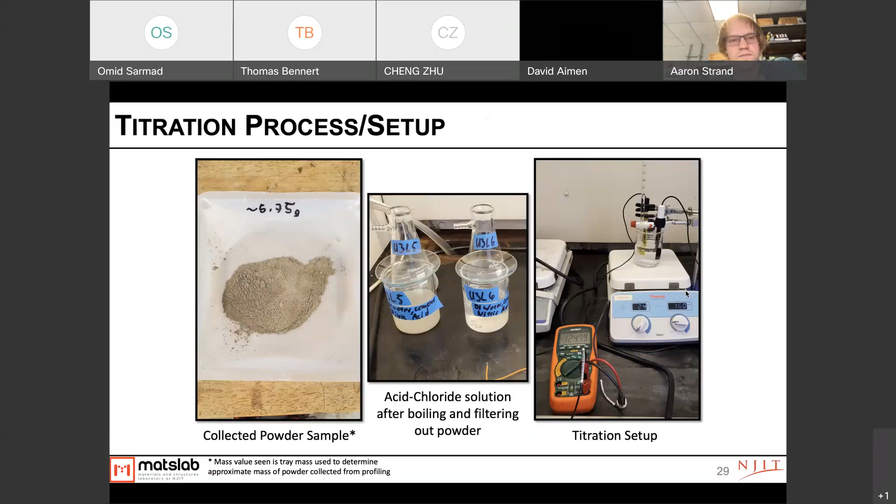So for the core samples profiling, basically we saw that within a couple months of starting the testing, we did see a fairly high amount of chloride. It was interesting to notice that as the testing continued, we did see lower amounts of chloride, but this is likely due to the fact that the cores were all taken from similar but different areas of the deck, and the natural variations in the deck may have caused the amount of chlorides to change.

And also, for most specimens nearer the midspan, we did see typically a slightly higher amount of chloride than we did at the fixed ends. This is likely due to the moving load on the bridge deck causing a greater increase in the chlorides.

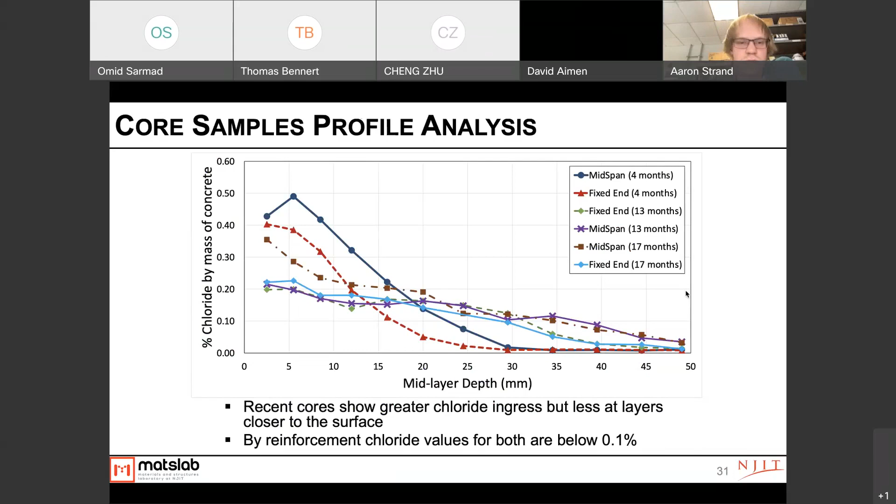Again, this is a combination of all the data where we can see the comparison between laboratory specimens and the field specimen. The laboratory specimens, especially the cracked ones, do show a fairly high amount of chloride within them compared to the real specimen. This is likely again due to the fact that we induced a crack versus what was naturally occurring from the actual finishing process and curing process of the deck.

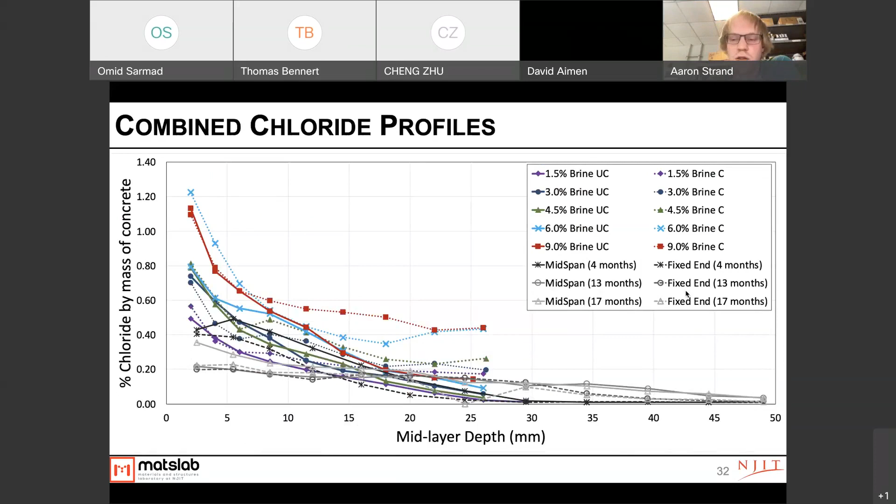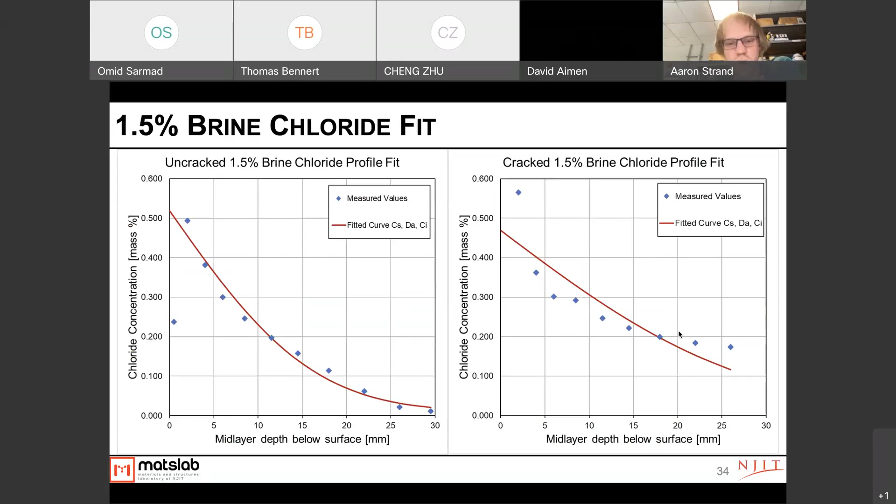So from our chloride content, we found that the chloride content was greater in lab specimens, especially when subjected to higher brine concentrations. A similar chloride content was found near the surface for cracked and uncracked specimens, though it was greater in cracked specimens at depth.

The coefficient of diffusion was similar for all uncracked specimens, which makes sense since at the end of testing none had shown any amount of corrosion at that point. The apparent coefficient was greater for all tested crack specimens, again because chlorides can penetrate much quicker.

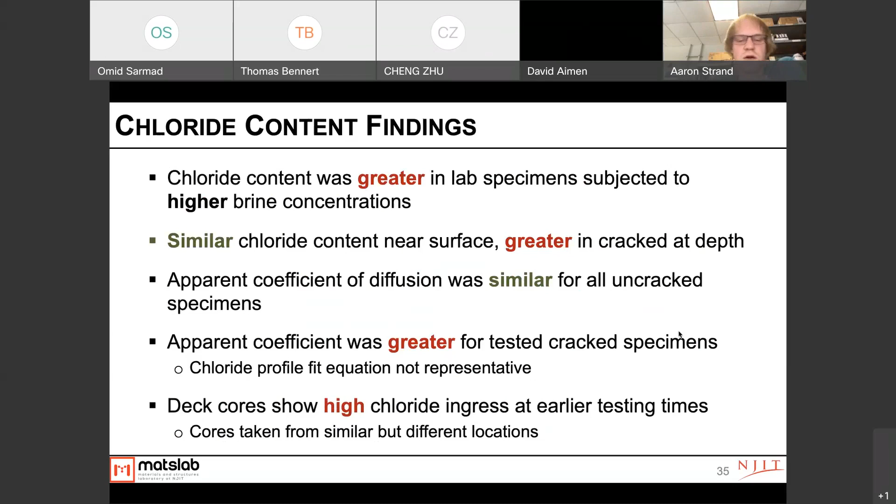But this chloride profile fit shows that this might not actually be fairly representative of what's occurring. The deck cores show high chloride ingress at very early testing times, and again, the cores are taken from similar but different locations.

So from this work, there are three different ongoing projects within our research group. One of the testing efforts is looking at other concrete mixture designs, and also other types of rebar, and how those things impact these results.

Also from some of this data, we're working on developing a model. One of the other researchers in our group is looking specifically at how to model the amount of chloride content and the corrosion current specified within these specimens, to maybe give better insight into the chloride content of what's actually occurring.

Thank you, and I can take any questions now.